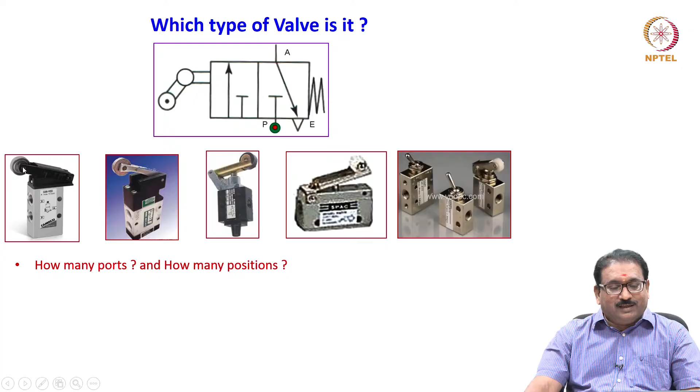Can you please tell me what is this, friends? See some of the features of this. Quickly you will see how many ports are there and how many positions. Yes, P port is there, A port is there, E port is there, and two positions. This is a null position, this is actuated position. How is it actuated? Using idle return roller valve. You will see the roller valve. 3 ports, 2 positions. Hence it is a 3/2 DCV.

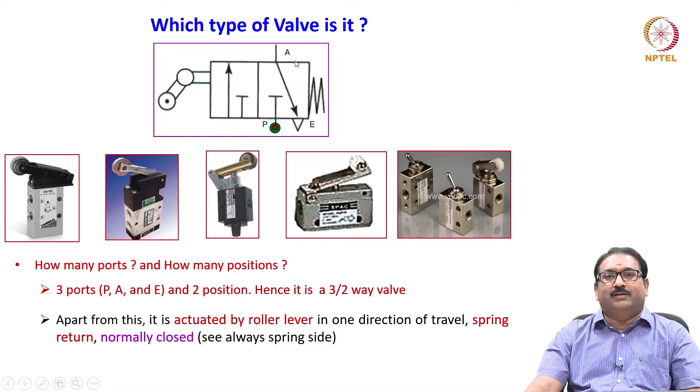Immediately you will tell then how it is actuated. Apart from this, it is actuated by the roller lever in one direction of travel and spring return, normally closed. See, always it is a spring side, normally closed type. Quickly you will see the operation.

Of the 3/2 idle return roller valve. I am showing you here, the idle return valve is placed in the direction of the actuator motion, linear motion. When it hits, it will actuate. When it fully extends, it will release. While coming back, it slides over it. It is not actuated. How it is, you will see with the sketch.

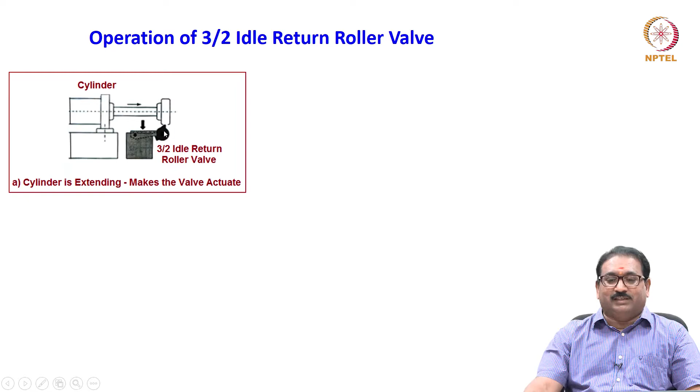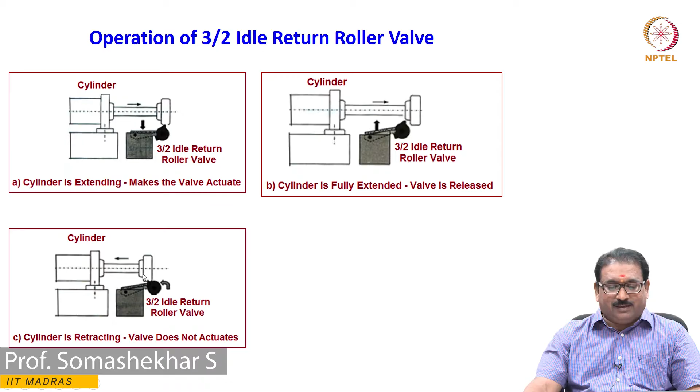Here you will see, friends, the cylinder is extending now, makes the valve actuate. You will see here, valve actuated, only once. Cylinder is fully extended, you will see the valve released, here released. Here you will see the cylinder is retracting, the valve does not actuate here. After retracting completely also, the valve does not actuate, meaning that only in one instant it is actuated, then it is released. This has plenty of application in pneumatic circuits when you are handling multiple cylinders to overcome signal conflicts. We will see these things when we discuss the circuits.

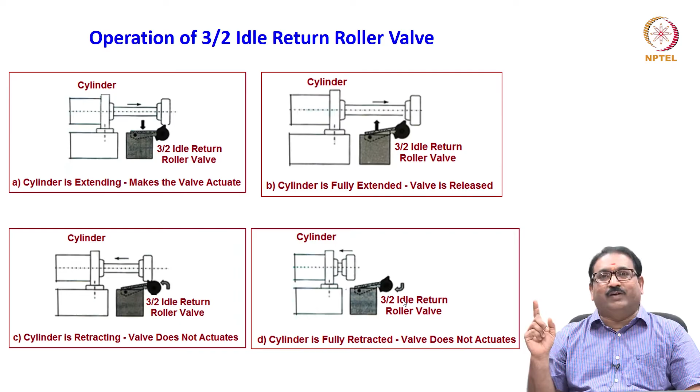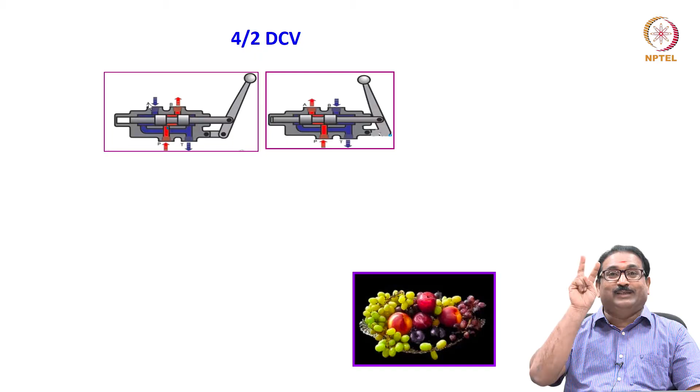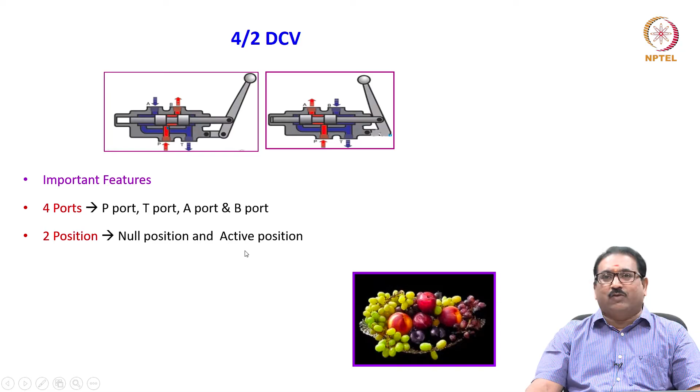Quickly, important features: 4 ports, P port, T port, A port and B port, 2 positions, null position and active position. Null position is always achieved through the stiff spring. Active position is achieved through any one of the actuation methods. Quickly we will see the constructional feature here, friends.

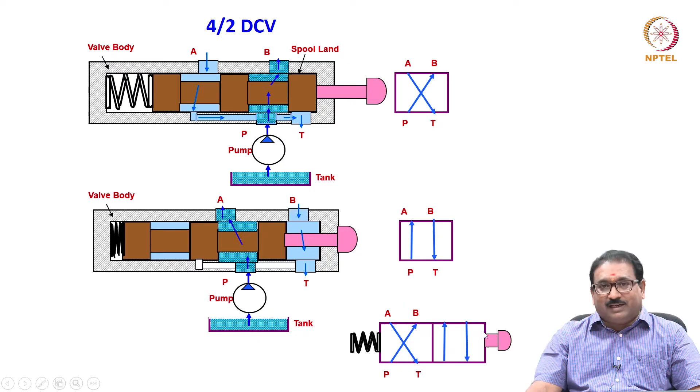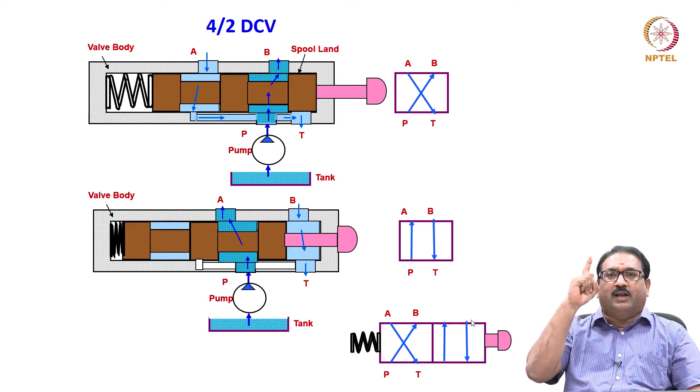How to represent these two completely? Completely represented by the symbol like this. What is this? You will see the crossed configuration: P is connecting to B, A is connecting to T, with the spring, stiff spring, at the spool end. When you press this button, how to read this? P is connecting to A, B is connecting to T. But don't write any symbol here; always the numbers are engraved on the valve body at the null position. Please understand, friends.

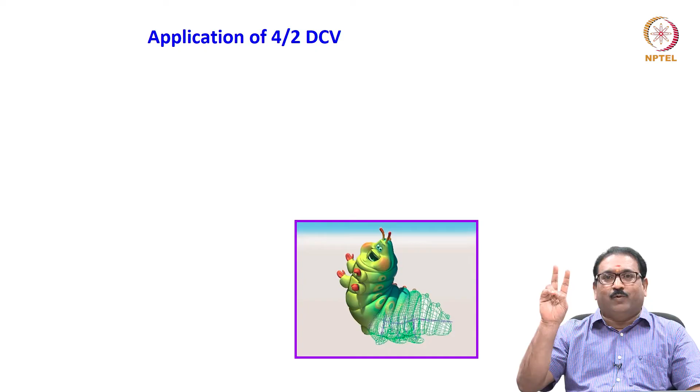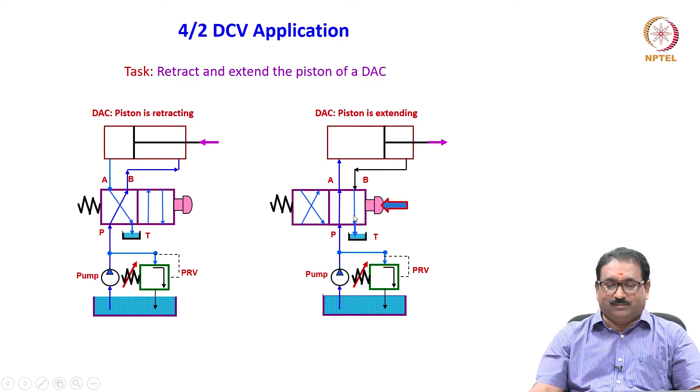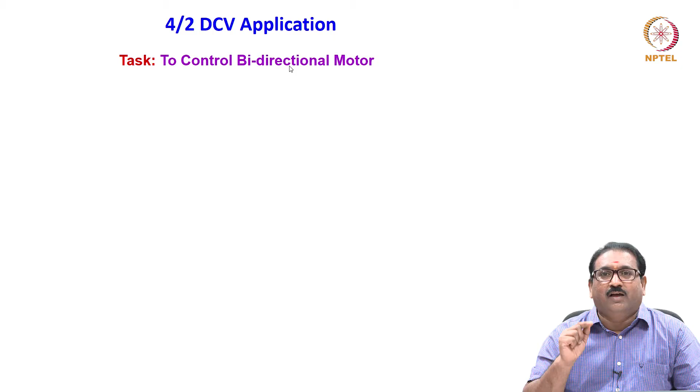The same way, the 4/2 DCV is also used to control the bidirectional motor, whether it is an air motor or a hydraulic motor. Meaning once in one position it is rotating in the clockwise direction, when you move to another position it will rotate in the anti-clockwise direction. Based on which direction you want torque and motor speed, you will do it using the 4/2 DCV along with your motor.

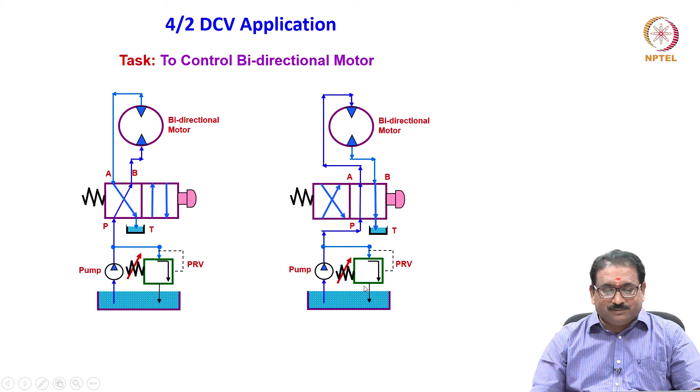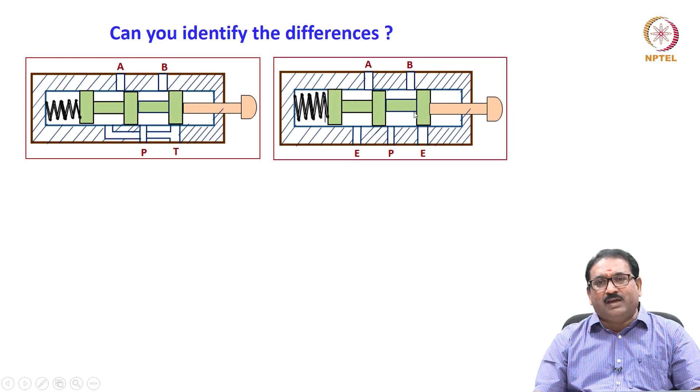Then question arises, sir, this is a 4 port, this is a 5 port. The position also as usual is 2 position. Then shall I call it a 4x2 way DCV or shall I call it a 5x2 DCV according to the number of ports? Let us see it now.

Ports are: one P port is there, one tank port is there, 2 actuator ports. Here you will see in this sketch, one P port is there, 2 exhaust ports are there, E and E, 2 actuator ports A and B. Valve position as I have told you, null position and activated position. Null position, activated, 2 position. It is read as a 4x2 DCV found in hydraulics.

This is 4x2 DCV found in pneumatics. What is the meaning here, friends? See here, the exhaust ports are kept open to the atmosphere after doing the work. But here you should not leave the oil either in the crossed configuration or a parallel configuration. The oil should be sent to the tank because they are petroleum based fluids, easy to catch fire in hydraulics. That is why the 4x2 DCV of hydraulic valves are expensive, because they will cut internally here.

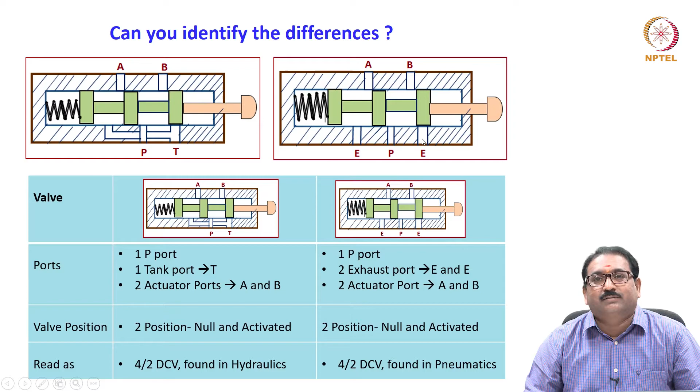They will not do like this. Quickly we will see these features very quickly. 4x2 same valve, 4x2 hydraulic valve it is what I have shown. Here 4x2 pneumatic valve, 4x2. How to represent you will see, friends. 2 exhaust ports are there.

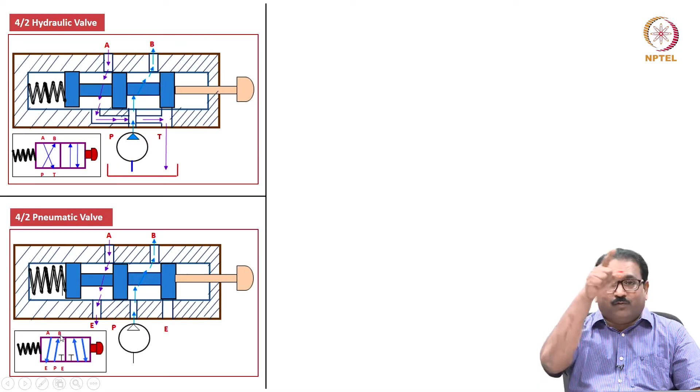Here how it is, P is connecting to B, meaning it is retracting. The flow in the head side, A is going to E. When you push this, what happens, friends? P is connecting to A and B is connecting to exhaust with actuation. Quickly you will see this.

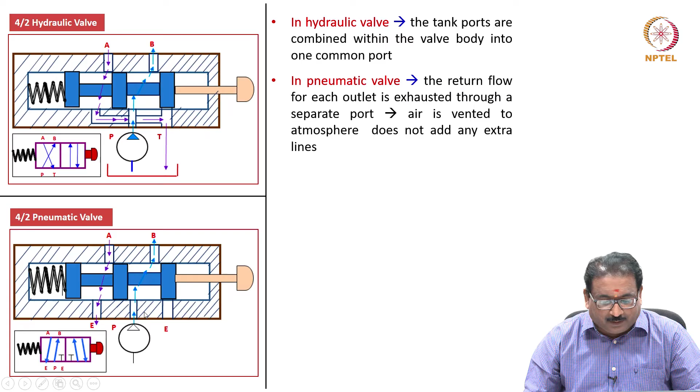In hydraulic valve, the tank ports are combined. See here, tank ports are combined within the valve body into one common port. In pneumatics, the return flow for each outlet is exhausted through a separate port. Air is vented to atmosphere, does not add any extra lines. But in hydraulics, if you provide two separate lines, not cutting this cavity, what happens? Again the piping systems are all required. It adds to the cost.

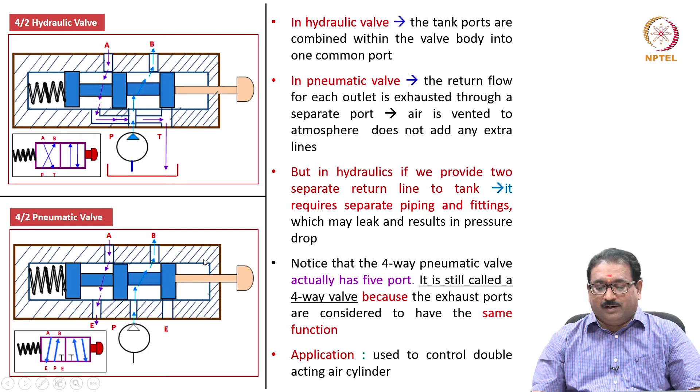Notice that the four-way pneumatic valve actually has 5 ports. It is still called a four-way valve because the exhaust ports are considered to have the same function. Application here is used to control a double acting air cylinder.

Another category, can you please identify the difference between the valve what I have shown here? How many ports are there here, you will see? Already you know this is a 4x2 way valve. Here also same, here I have not written EPAB, instead of that 1.

Sometimes in pneumatic valves are represented as 1, 2, 3, 4, 5. Here 1 is, please understand, a pressure port, 3 and 5 are the exhaust ports, 2 and 4 are the A and B. This will come by practice. Then 14 and 12, how is it? You will see, what is this?

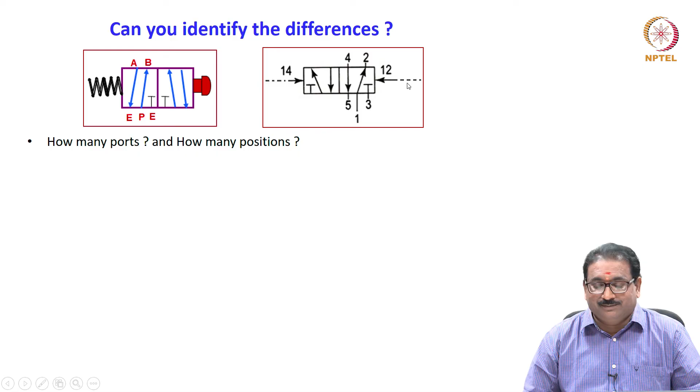Pilot operated symbol it is. Then you will see some features of these two valves. One pressure port is there, 2 exhaust ports, 2 actuator ports A and B. Here one P port is there, that is 1 in the symbol, 2 exhaust ports 3 and 5. In pneumatics mostly they will represent it like this, 2 actuator ports 2 and 4 and 2 pilot signals 12 and 14.

Positions, how many positions? This position, this position, meaning only 2 positions are there in each valve, the null position and the activated position. Then how to read this, friends? As you know, already we have read this. Even though exhaust ports are 2, function is same, meaning vent the air. That is why it is called 4x2 DCV, found in pneumatics.

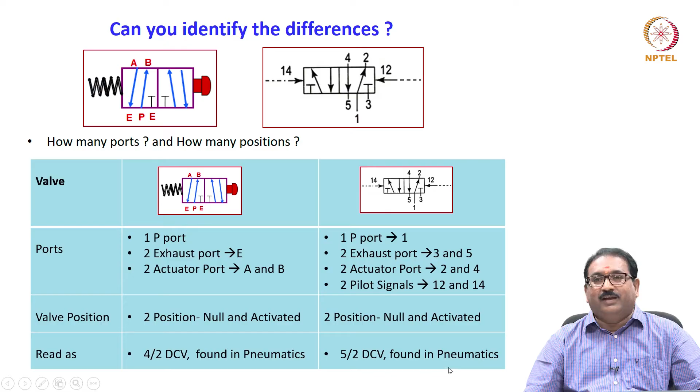Then operations, I will tell you very quickly. This 5x2 operation, you will see, this is a spool valve. The ports are there as I have told you, one is pressure port, 3 and 5 are the exhaust ports, and 2 and 4 are the actuator ports. 12 and 14 are the pilot signals, X and Y, whatever it is, capital letter, or here it is 12 and 14. Let us see.

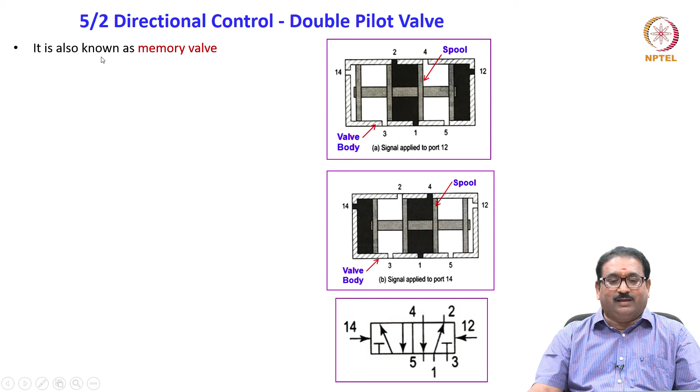It is also known as a memory valve. 5x2 way valve is a memory valve, referring to the figure, a pneumatic signal is at 12 now. You will see here, it causes the spool to switch over as shown in the figure. 12 is applied here. In this position, what happened, friends, here? 4 to 5, meaning 4 is venting the fluid here. Then 1 is connecting to 2, meaning 1 to 2 means it is extending, cylinder is extending.

Correct, 3 is closed. The valve remains in that position even if the signal 12 is removed, because it will always stay in these positions. If the signal is applied at 14, the spool switches over as shown in the figure here. Meaning what happened, friends, here you will see one pressure port is connecting to 4 and 2 is connecting to 3, meaning the cylinder will retract. But you will remember, even if 14 is removed, it remains in this position until 12 comes.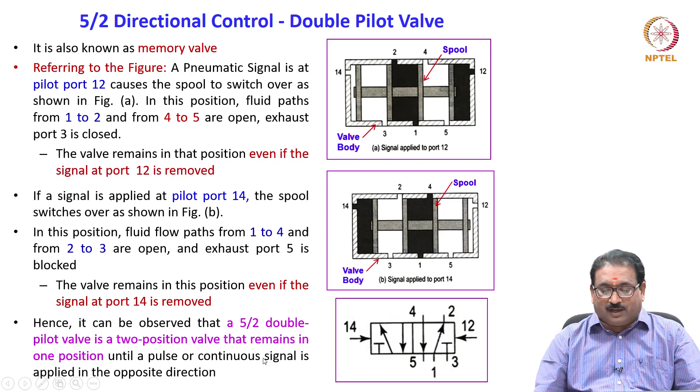In this position, the fluid flows, as I have told you, 1 to 4, 2 to 3, and exhaust port 5 is blocked. The valve remains in this position even if the signal at 14 is removed. That is why it is called memory valve. Hence it can be observed that a 5/2 double pilot valve is a 2-position valve that remains in one position until a pulse or a continuous signal is applied in the opposite direction.

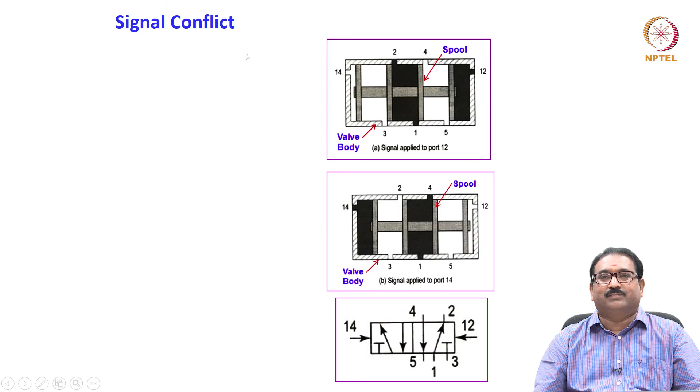This is what you can call a signal conflict. A major problem with the memory valve is its inability to change the switching position when the pilot signals appear simultaneously at both pilot ports. For example, if signal is coming from 14 and 12, it cannot switch over. It gets confused, it will hang, the valve will hang. These signals produce equal and opposite forces on the valve spool, and hence it tends to remain stationary until one of the signals goes off.

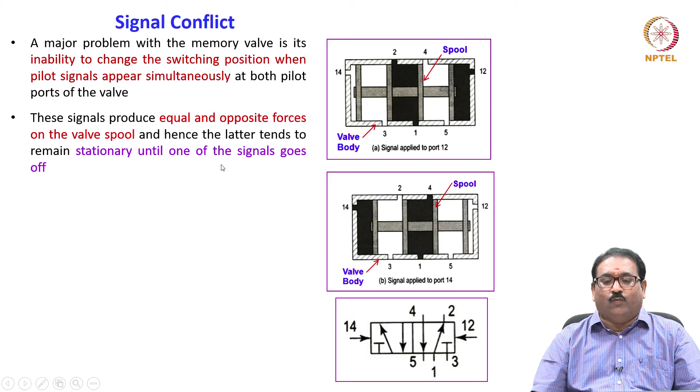This problem is called signal conflict or signal overlay, which is a major hurdle in multiple cylinder circuits. Various methods have been developed to overcome signal conflicts. The following valves or modules may be used for avoiding signal conflicts: idle return roller valves, reversing valves also known as memory valves, and modules as a combination of valves. These things we will discuss when we are designing the circuits.

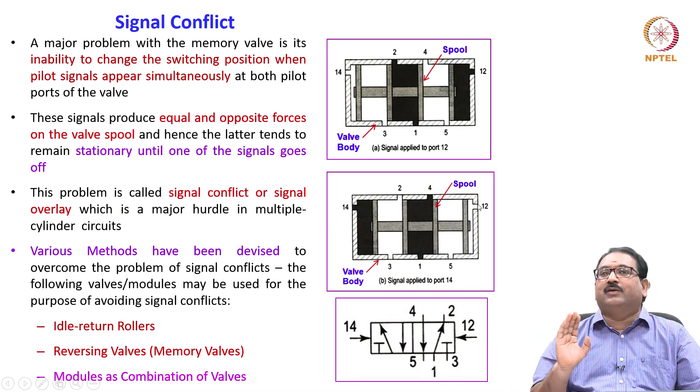Now we will remember this 5/2 valve is a memory valve. It will operate only when 12 is coming. It connects 1 to 2 and 4 to 5. When the 14 pilot signal is coming, it connects 1 to 4 and 2 to 3. If 2 signals come together, it will not switch over. It is known as signal conflict.